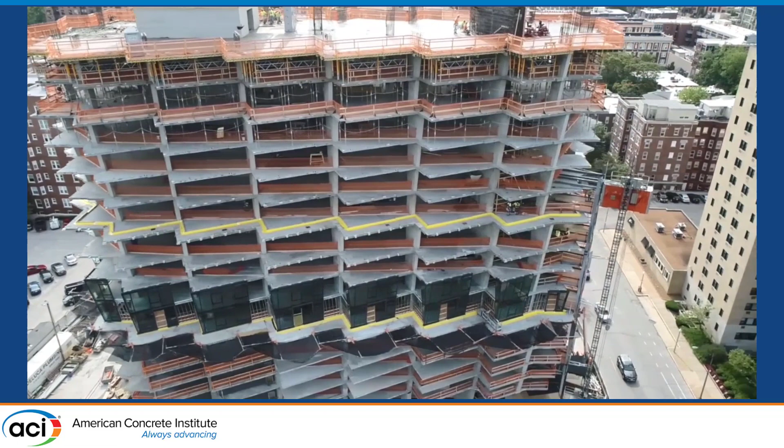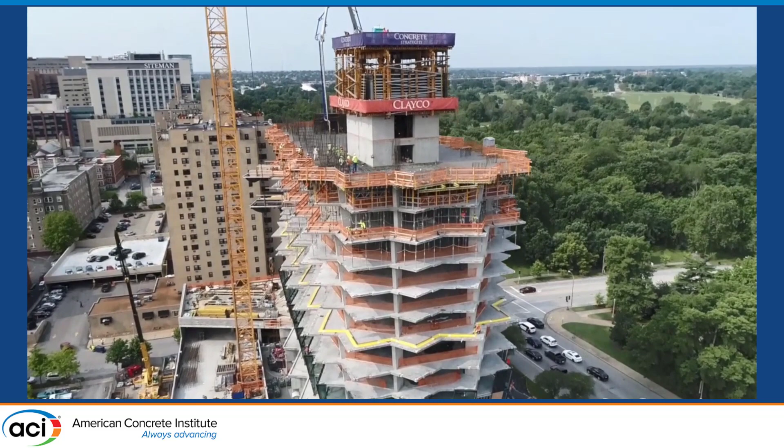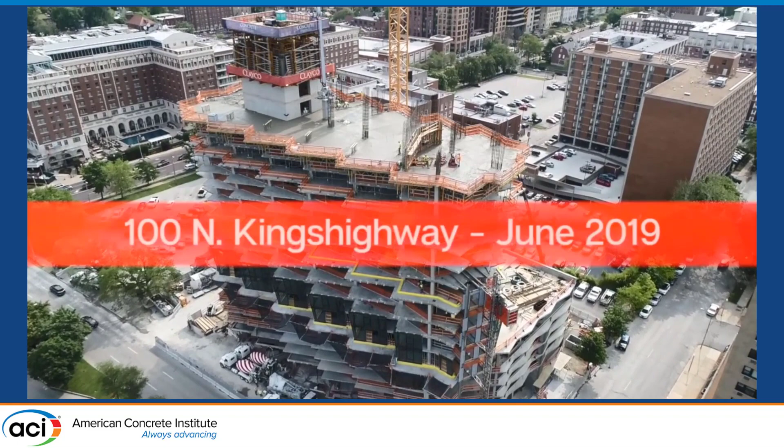We're all here at a concrete conference, so what I want to talk about is how we built the building. This job is a 37-story building, and we built it in about 18 months from foundations to top out of concrete. We were flipping a floor about a floor a week once we got to the residential tower. So I think talking through that is what I want to highlight today: the floor plan, some of the different rebar and PT constraints we worked through, and then just talk about some of our suppliers and formwork and equipment we use to make this project successful.

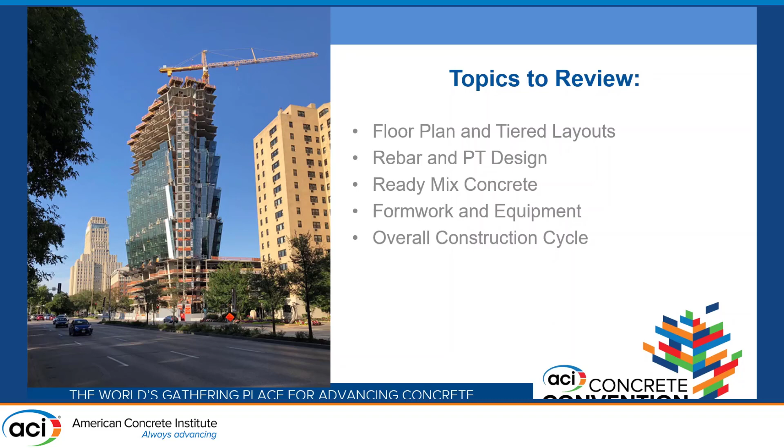So I kind of highlighted these things we're going to talk about, and then last we'll get into the overall construction cycle if we have time to talk through that.

So the footprint of the building is a 25,000 square foot footprint. The slab on grade was a structural slab on grade, which was heavily mildly reinforced, so there was no post-tension cable in the slab on grade. As we went elevated, the parking garage was a 25,000 square foot footprint, and we poured it in two different pours, each one about 12,500 square feet. We were able to flip the parking garage in about 7 working days per pour.

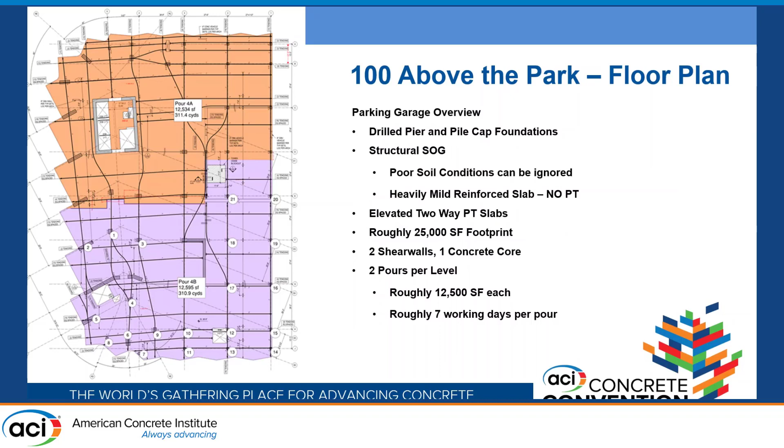Level 7 was a big transfer level where we had a big pool and amenity deck. We had deep transfer beams that we'll touch on a little bit later.

But what I want to highlight is the residential tower. Each tower footprint was built using 4 level tiers, so each tier was growing, and you can see that in some of the later pictures. Each tier got bigger as we went up. The footprint grew from around 11,000 square feet of floor to about 13,000 square feet of floor. The 4th floor in every tier had a balcony level, so one of the big design constraints was how do we waterproof this balcony level, how do we have a seamless transition from the inside space to the outside space while waterproofing that balcony level?

And then the structural elements associated with each floor, we had 16 wallumns, as I call them. We had 3 typical columns, 1 elevator core, and 1 shear wall on the south side.

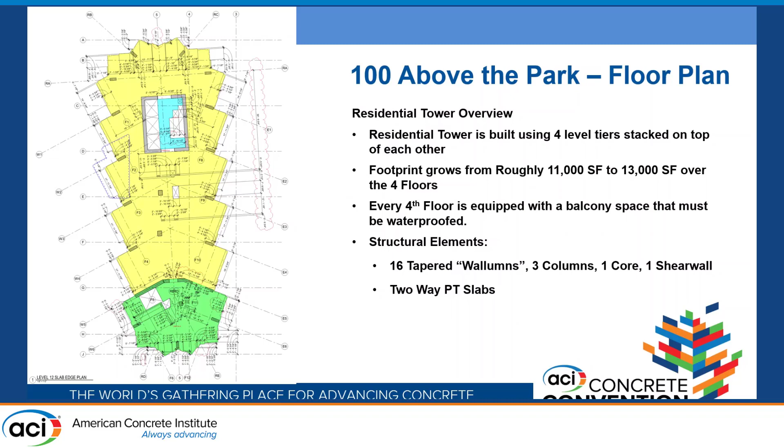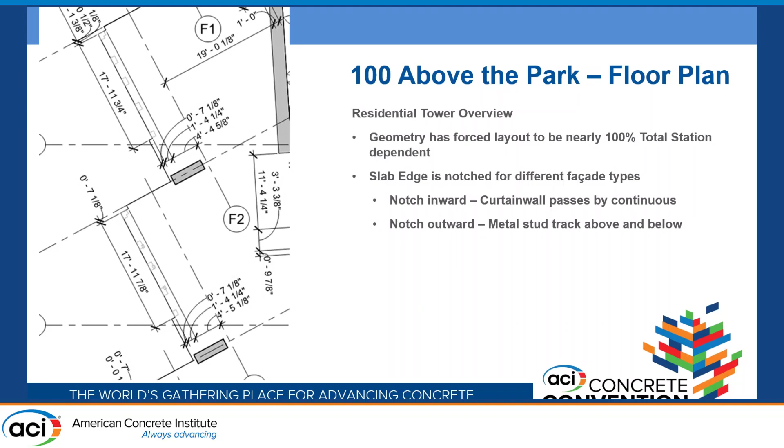The geometry of the building gave us some struggles with the layout. Your layout almost had to be 100% total station driven. So one thing we did in-house with our in-house design team was come up with a slab edge plan that took into account the curtain wall versus the metal stud paneling. So a notch inward that you can kind of see where we showed the embeds, that the slab edge is notched inward and then bumps out for the metal studs as the curtain wall ran past each floor, and the studs ran from top of slab to underside of slab, so that's something to anchor to.

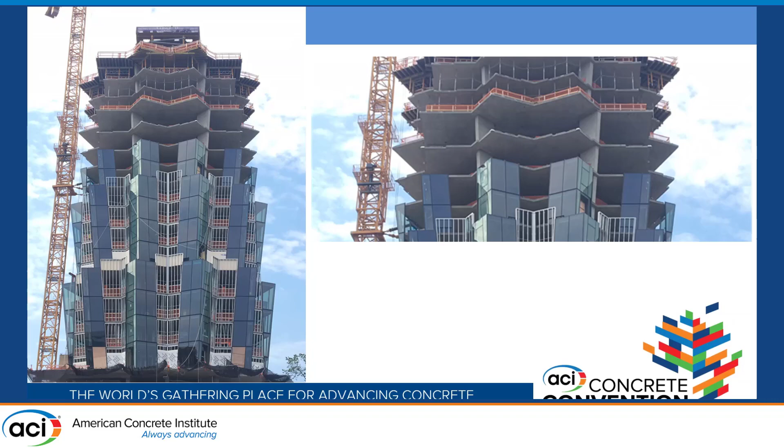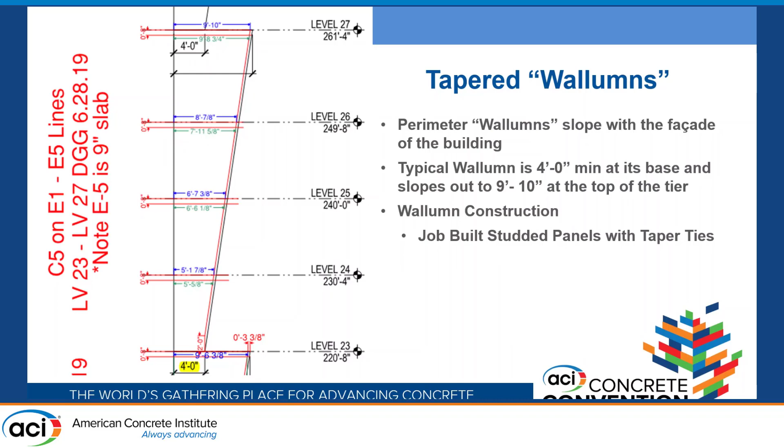The wallumns, as I call them, is kind of a made-up term, but it's more or less a column, though we treated it almost like a wall. What I want to highlight is at the bottom of every tier, that column starts out at 4 feet wide, and at the top of that tier, that column is 9'10" wide. So setting a column form that tapers and slopes, and is big enough to encompass a growing column, was something we had a challenge with.

What we ended up doing on the job was just make simple studded panels. It seems so simple to say, but it's truly just 3/4 inch plywood with 2x4 studs, and then 2x6 walers and taper ties.

The rebar you can see in the picture is pretty cool, setting that rebar to the slope. It took a lot of time to plan and work with our rod busters on what that shape was going to be, and to make sure they had adjustment in those ties. So we pretty much relied on a lap of all the column ties, that way they could set that slope exactly what we needed it to be.

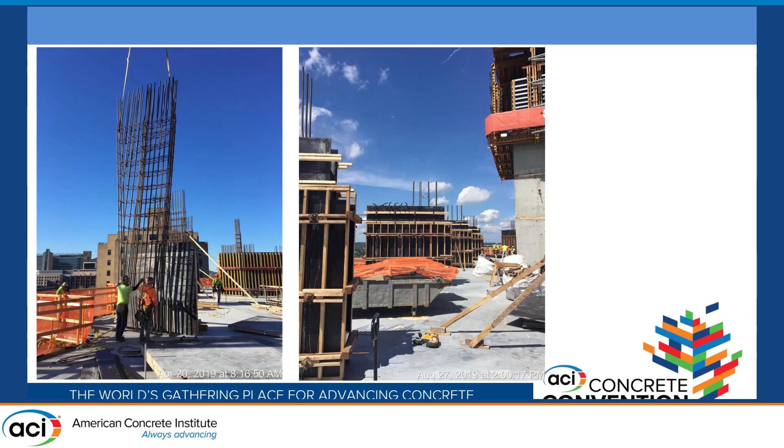This picture, what I want to highlight here is truly those wallumns we're talking about. You can see in that picture the back side of that column is perfectly straight and plumb, and that front side is sloping as the building's growing. Again, that floor is growing from a 4-foot wide column to a 9'10" wide column. So the entire footprint is growing by about 5 feet over those 4 floors.

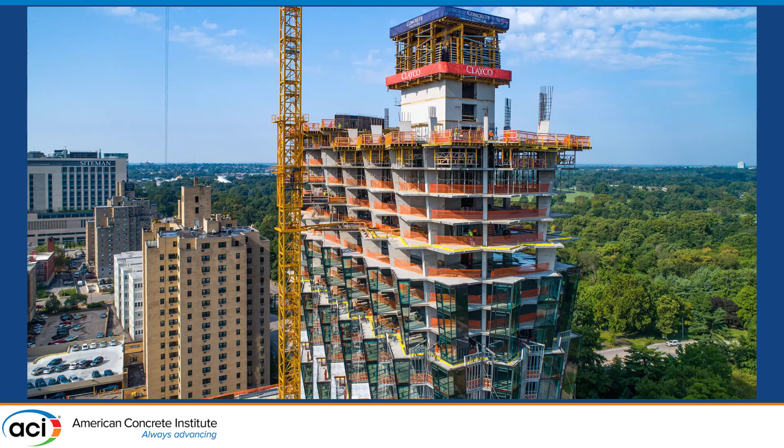In the essence of time, we're going to kind of sprint through rebar, but the one thing I want to highlight the most is the level 7 transfer beam. One thing we did as part of our schedule, to try to increase schedule, because that's what's most important these days, is we brought the elevator core up ahead of time.

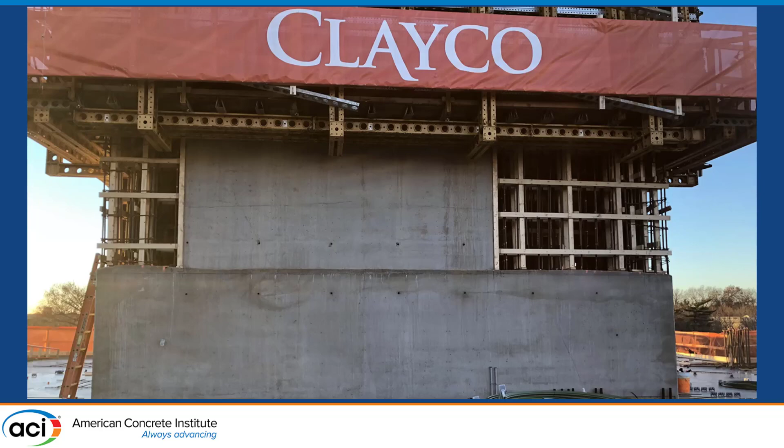We put large blockouts in the elevator core to allow the transfer beams to tie into. So in-house, we did some modeling of that rebar to see how congested it was going to be, to plan with those blockouts in the elevator walls.

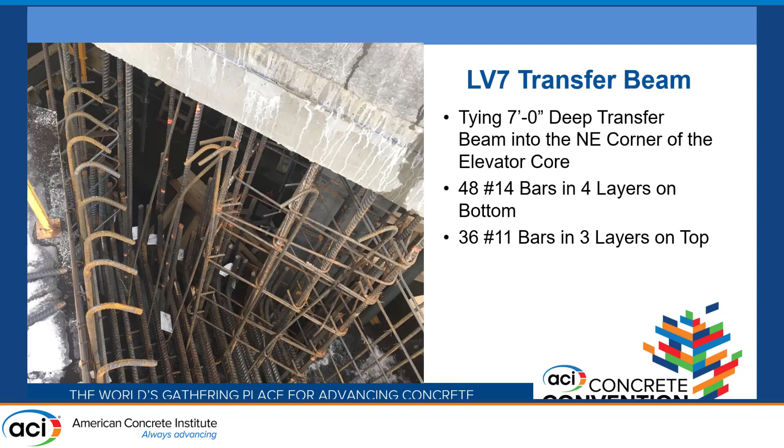This is a picture looking in the northeast corner of the elevator core. That transfer beam was 7 feet deep and 5 feet wide. On the bottom, we had 48 number 14 bars stacked in 4 layers, and 36 number 11 bars on top, stacked in 3 layers. But we had to intertwine all those bars amongst the column rebar in the wall, and the wall verticals and horizontals, with concrete above and below, so you had no play in those verticals. Trying to plan all that and make it work was a job in and of itself.

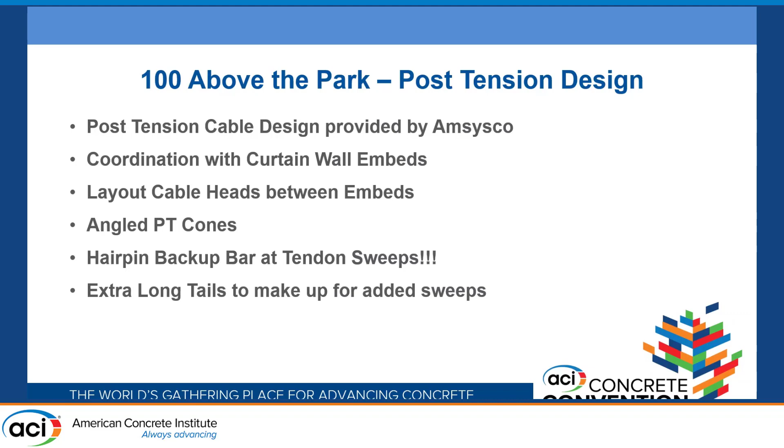Post-tension cable design, again, was provided by Amsysco, who's based out of Chicago. They did all the PT design and all the PT supply. One thing that's interesting on this job is when I think of post-tension cables, we like to think of straight runs, nice square forms, easy to stress out of.

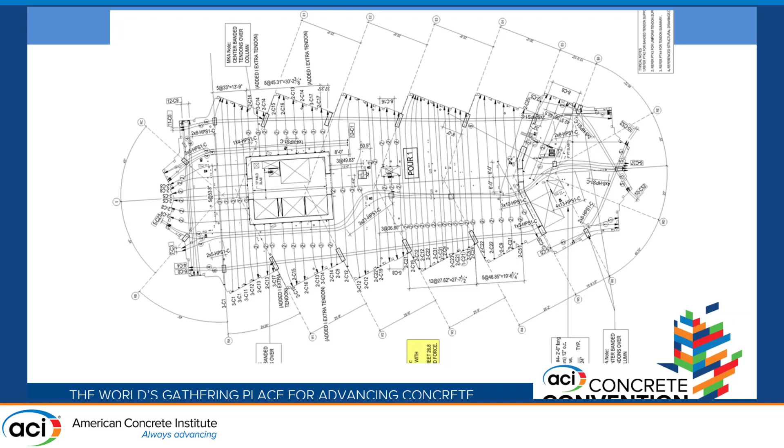This overview kind of shows you the curvature of all the cables and how we had to make them work. So everything's arching, sweeping. We had a lot of backup bar, a lot of hairpins to prevent blowouts on this job. But what Cisco was able to provide was called angled PT pocket formers, or the angled PT cones.

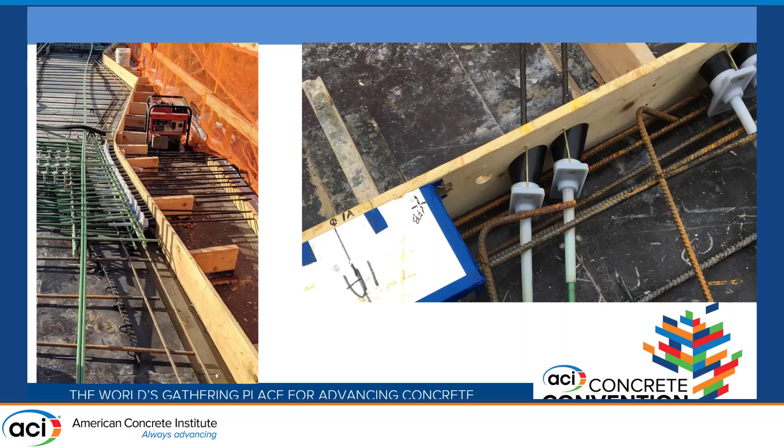It took a little trial and error, but they were able to supply us with 30-degree and 45-degree pocket formers. So when we had an angled edge form, that cone would sit square on the form despite the edge form being on an angle.

Concrete we'll touch on briefly. Historically, we all think of concrete as 4 components: sand, water, cement, and rock. Today, with all the chemical admixtures, it's a science that's changing the landscape.

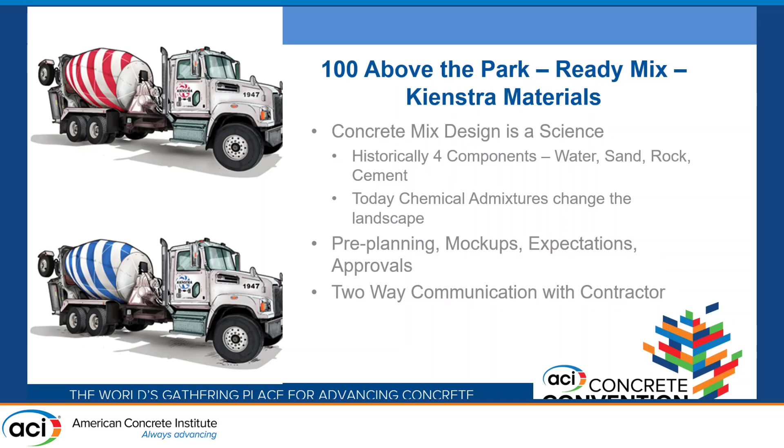Our supplier, Kienstra, was pretty paramount in the pre-planning side of things, and they supplied 2 mixes I want to highlight. There was a 10,000 PSI self-consolidating mix with a 27 to 30 inch spread. That mix had a 56-day spec at 10,000 PSI, but we were breaking around 10,000 PSI at 14 days.

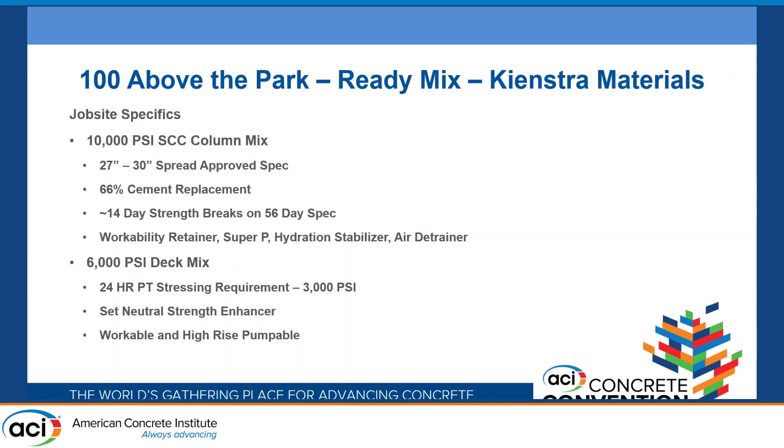The 6,000 PSI deck mix had a 3,000 PSI requirement to stress. We wanted to stress the next day to turn our cycle, so we had to have something workable enough to get up 37 stories up a stack pipe, but set quick enough to stress cables the next day.

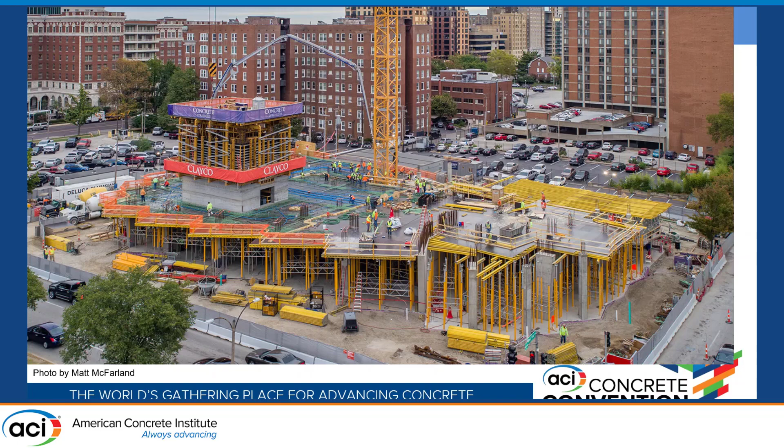90% of the garage formwork was hand set framing. We set the towers, laying out the joists and laying plywood. This is a single C picker used to fly a perimeter table.

We had 2 different C pickers on the job. A single C picker flew the single tables, and a double C picker was custom built by PERI to allow us to fly some of these larger tables with awkward, obtuse angles and shapes.

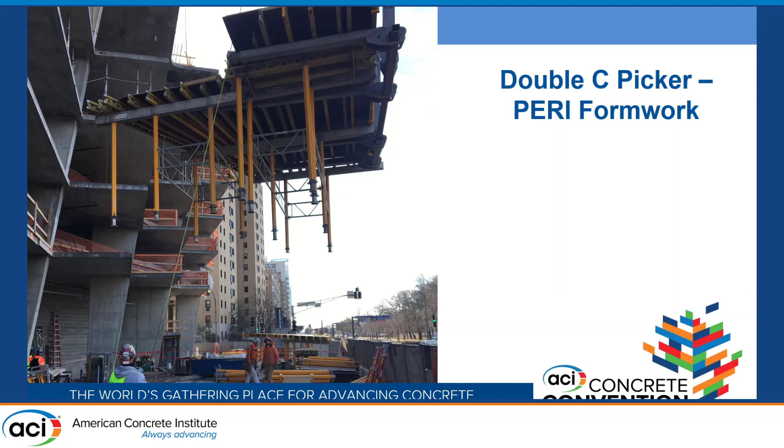We had a Vario shear wall from PERI, which allowed us to anchor it to the wall ahead of time, so the wall form was up in place prior to the day of the pour.

Here's just a picture from the southwest corner, highlighting all the different elements of the formwork.

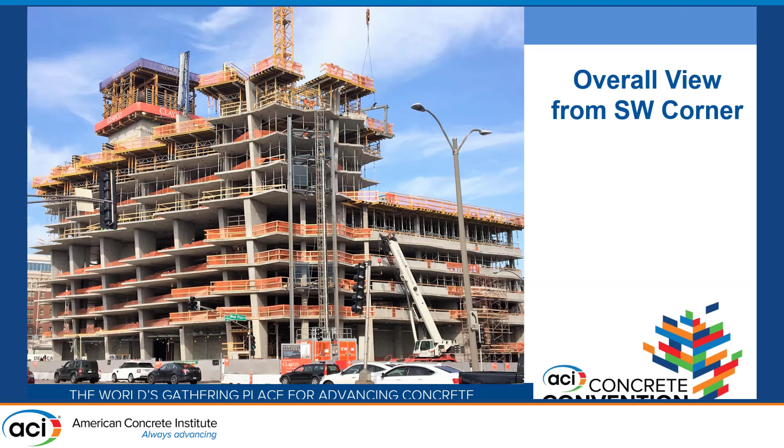The FCO self-climbing core, there's 2 things I want to highlight about it. One is it has 4 hydraulic cylinders on the inside of the core. Those hydraulic cylinders allow it to lift and jump itself without the use of a crane. We were able to jump it 9'8", which was our pour height, in 9 minutes and 37 seconds, which is pretty remarkable.

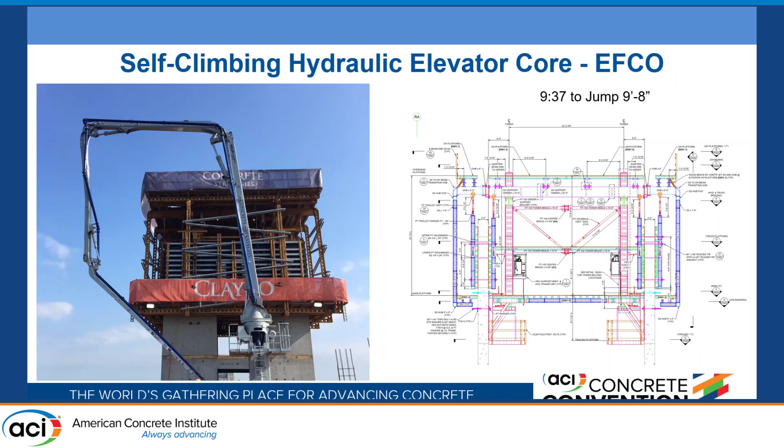We could have flipped this core on probably a 3-day cycle, but based on schedule and logistics, we had to flip it once a week to stay in line with our placing boom on the deck.

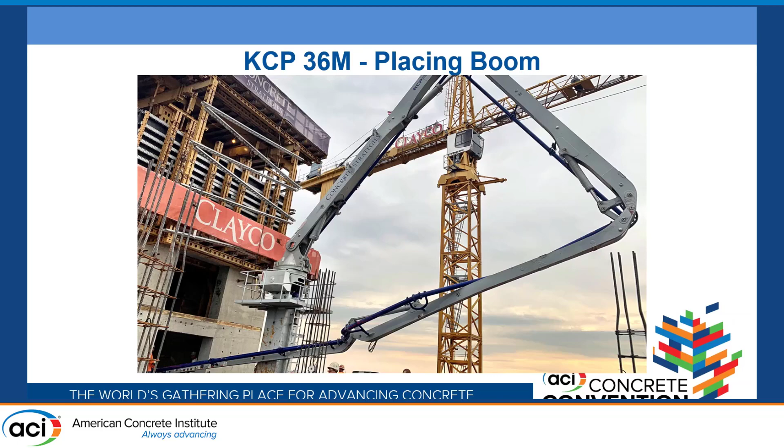The placing boom was a 36-meter placing boom, about the largest you can get on the market. We had to balance it so it could reach the south end of the deck, but also get up and over the core to place the north side of the deck while pouring.

Just to highlight the schedule quickly: Day 1, we would pour the slab and the vertical on the south side. Day 2, we'd stress. Day 3, we're flying formwork. Day 4, we're finishing formwork. Day 5 and 6, we're doing rebar.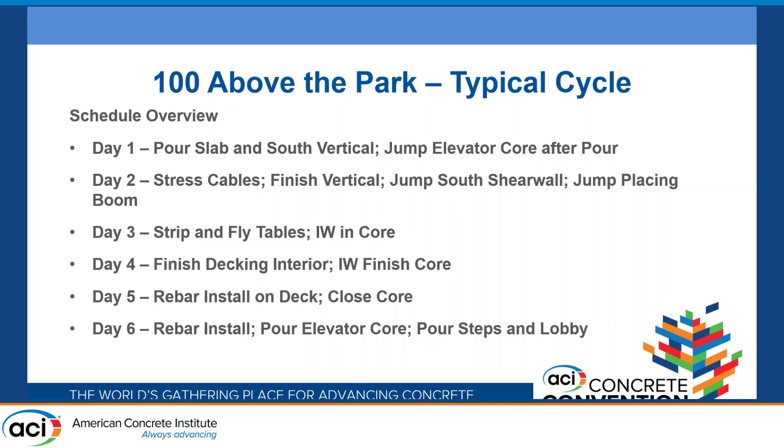On the south side, everything highlighted in blue, that south shear wall and the corresponding columns, we poured those the same day the deck was poured. So even in the hot summer months in St. Louis, we were putting NCA in the first 100 yards of concrete to make sure we could get on it that day to pour the walls and columns, because if we didn't get those poured the same day, the cycle was broken.

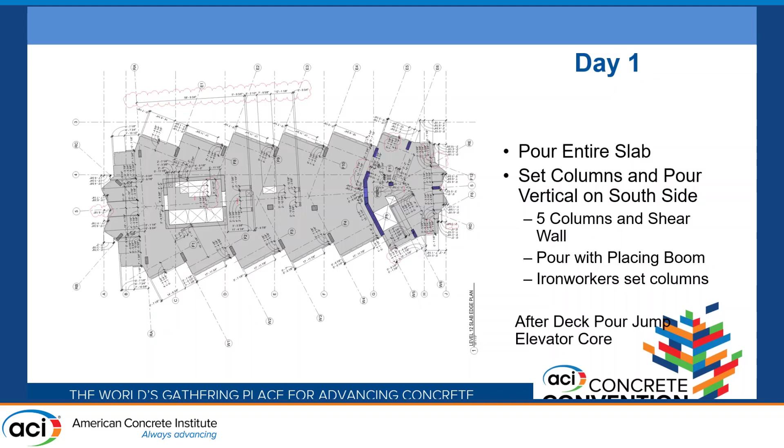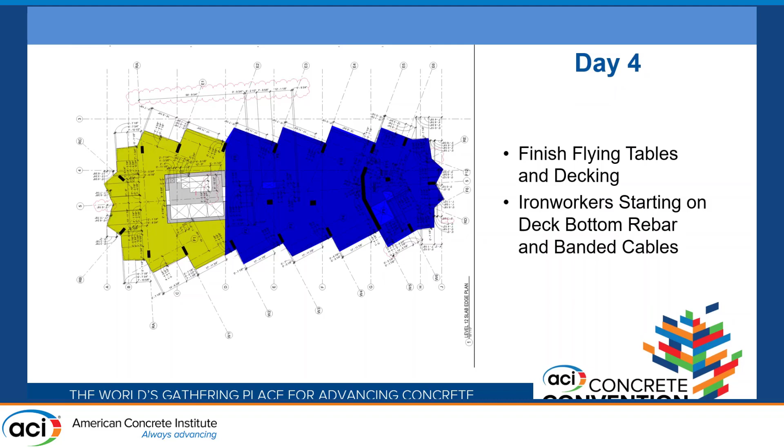On day 2, we finished the rest of the vertical when we're stressing cables. Day 3, we're flying formwork. Day 4, we're finishing formwork. Day 5 and 6, we're pouring the core and then moving on to the next level.

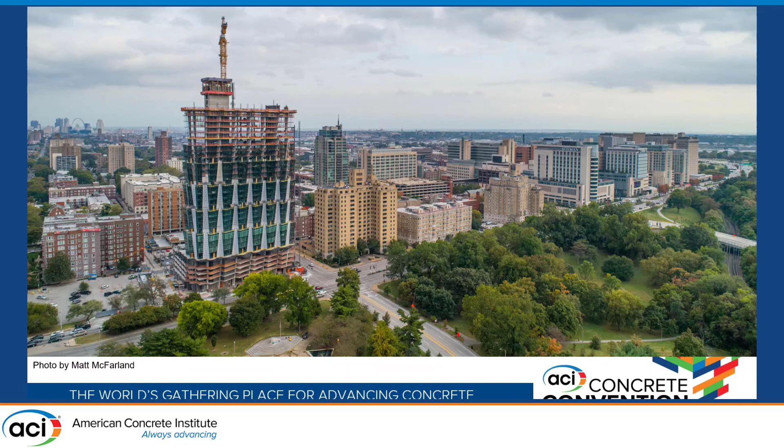This is just one last photo showing all the work in progress: the curtain wall glass, the concrete structure, all the tapered shapes, the elevator core, kind of all in one good photo.